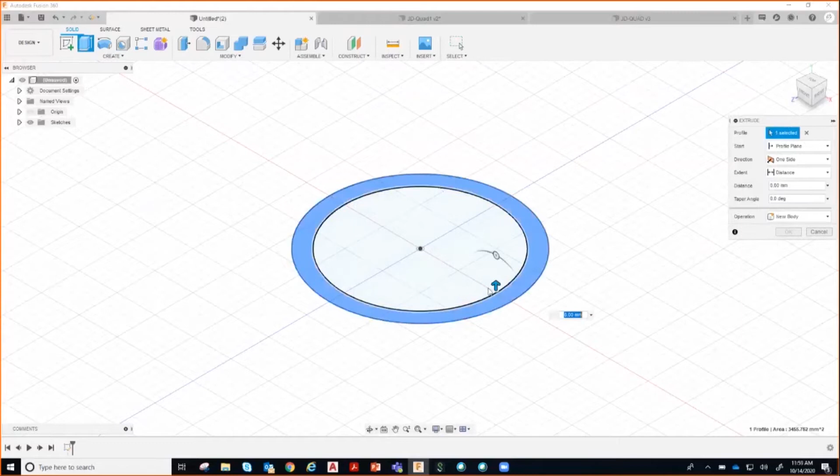So I'm trying to create a circle with diameter 120, and one more circle to give the thickness here. So this one will be 100. Finishing this sketch, I'm going to extrude this particular profile. This height I gave as 100. This is the center of my quadcopter where I'm going to place my battery, controllers, everything inside this.

And the next thing for the quadcopter, we need to have a place where we are going to fix the motor and the blade. So I'm going to create one more sketch here. Let me start sketch, I'm going to create it on the top plane. I will create a circle here, this one supposed to be 60 diameter, and the thickness supposed to be 10. I'm going to create one more circle here, so this is 50.

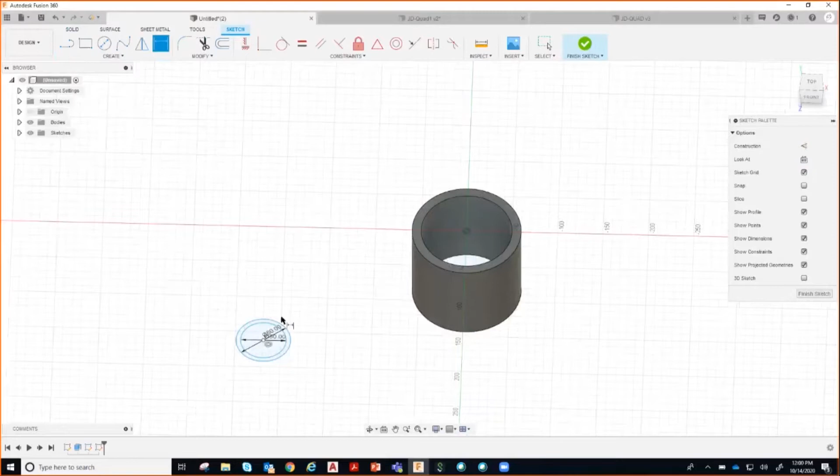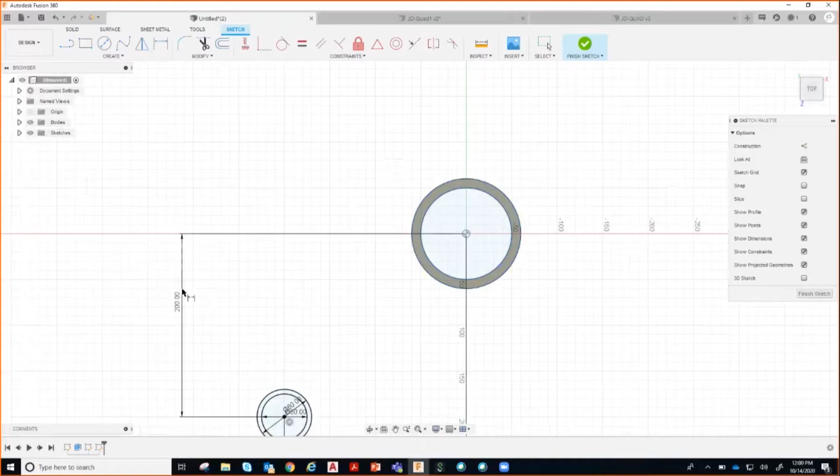Now the dimension for this. I'm going to create dimension from this center to this center, axis center here. This is supposed to be 200, and the same vertical dimension also I'm going to take as 200. Now, finishing this sketch, I'm going to extrude this again, extrude this particular profile towards bottom, in the minus direction. So I give this as minus 50, 50.

So obviously, for the quadcopter, we need to have 4 components where I can fix the motor and blades. So I just have to pattern this particular model here, circular pattern. This whole thing I'm going to create as a pattern, and the axis will be the center, and the number of quantity, so I change it to 4.

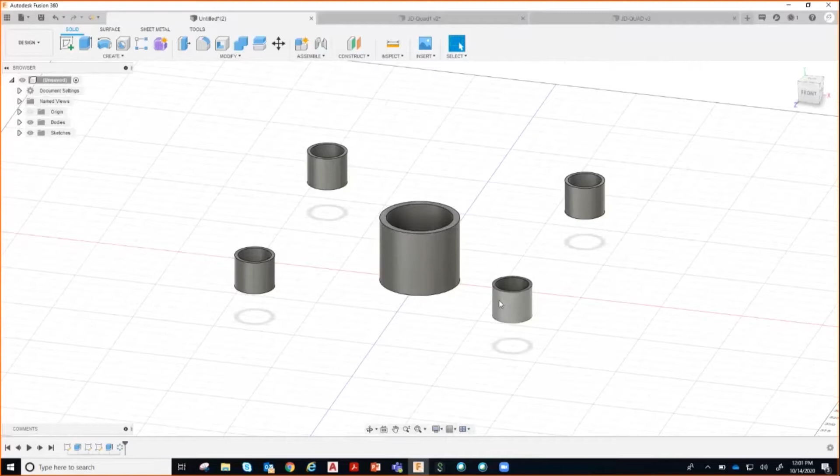This is the basic design, basic idea of what I have. So I need this big space to place my battery and all the controls, everything, PCB. And next, these are the 4 places I need to fix the motor and blade. This much knowledge I have at this point, this is the basic thing. Next, I don't have any idea how I'm going to connect all this, what should be the best shape so that I can reduce the weight. I can have a minimum weight on this so that the drone can fly properly. First thing, second thing the manufacturing criteria, and the third thing, load - how much load it is supposed to carry.

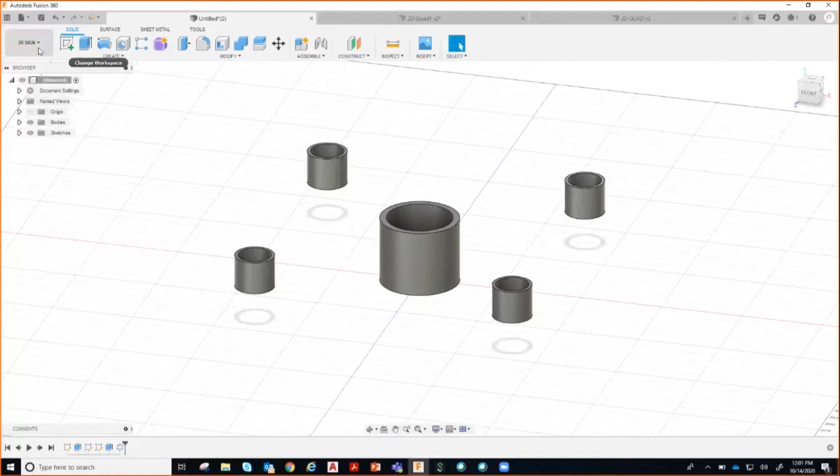To consider all these things, what I'm going to do now is start with the generative design. Once I click on the module, here you can see the generative design. After selecting this generative design, you can notice the complete user interface will change here, and you can notice the toolbar.

So once after completing this, there are a couple of things you have to notice. First, if you go to guide, the software will help you understand step by step how you're supposed to use this generative design module. It has been explained in a very simple way.

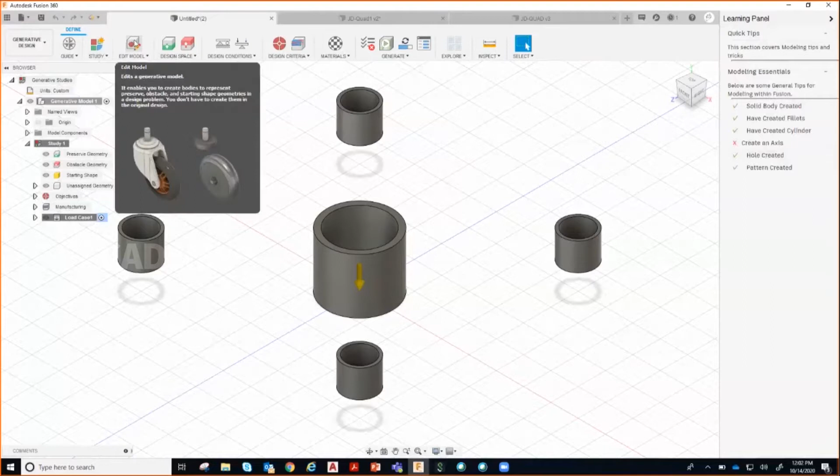So first thing is study. You can have multiple studies on one single file. If you want to edit the model, we have to consider preserved geometry, obstacle geometry, and loads. I'm going to start with these locations, as I mentioned I'm supposed to use for my drone. That means this 3D model is my preserved geometry.

I must have this 3D component in my drone design. So this is the preserved geometry. I have made all these components as preserved geometry, which I'm going to include as part of my drone. This is must and should, so those components I have included here.

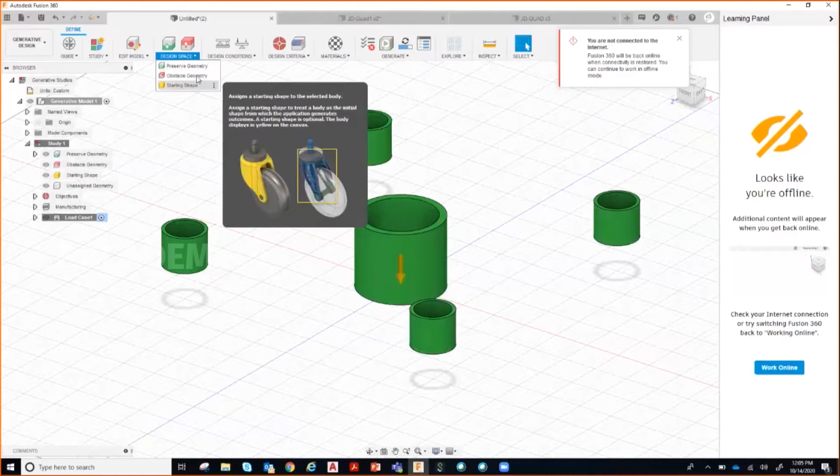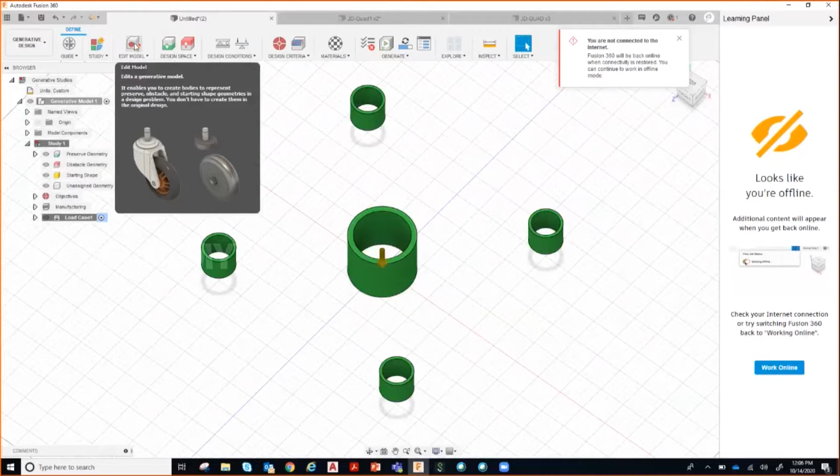The next part, I have an option to assign the obstacle geometry. The obstacle geometry is something where we do not want any 3D solid fill. I need sufficient space for all the other 3D models I have created, which is already preserved geometry. So I will select edit model, which is only applicable to this generative design. Whatever I create here is not visible on my Fusion 360 design screen.

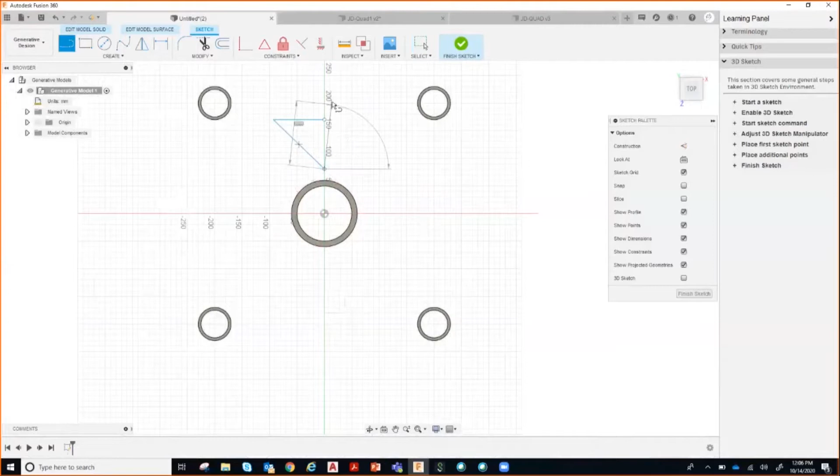Selecting edit model, I'm going to create a simple 3D space, creating a sketch on top of this plane. I will create a triangle here. This is the space I don't want the software to consider filling; I want this to remain free space. I'm selecting all this and mirroring it. Then finish sketch, and I'm going to extrude this particular portion.

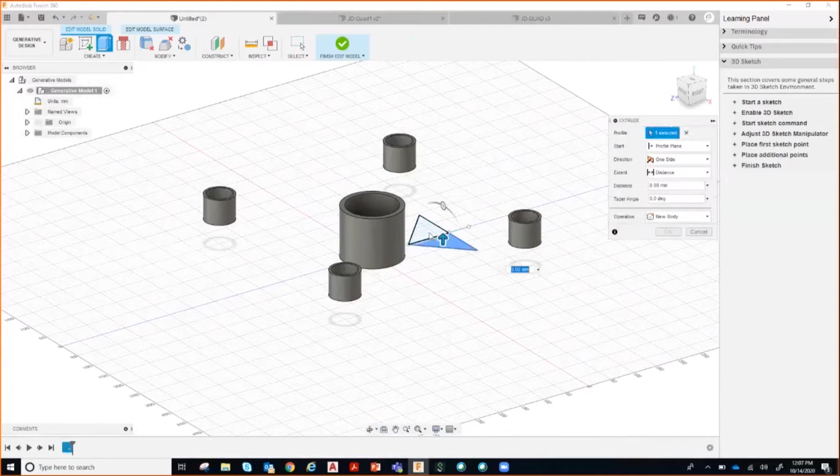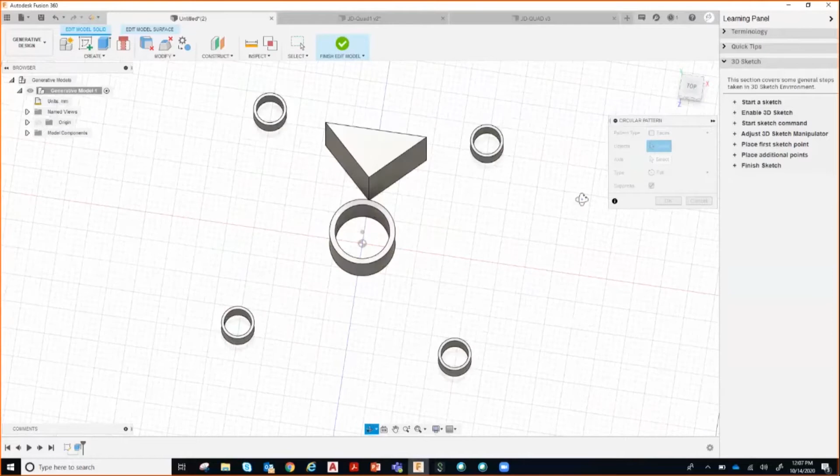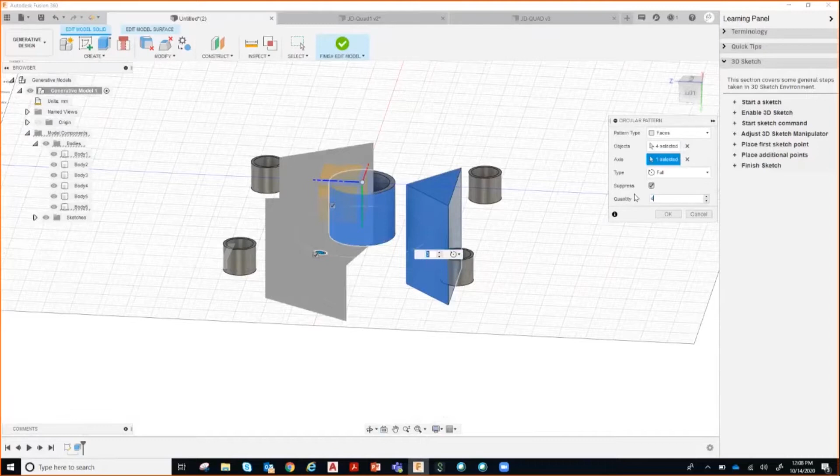And I will try to create a circular pattern of this. For axis, I'm going to select this center, then quantity 4. Sorry, it's not selected properly. Circular pattern - I'm selecting this component. Axis, this is the axis, then quantity I will select 4. Something wrong, okay let me just edit the sketch so I can create the pattern there instead.

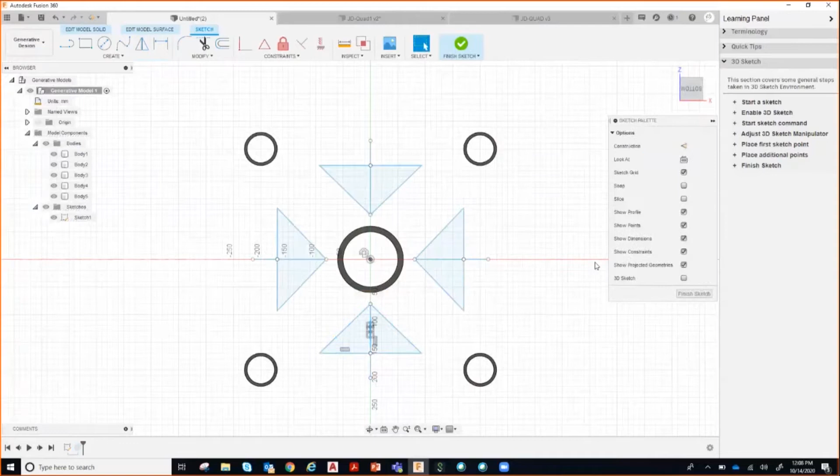In the model you can notice there are 3 additional pyramids here, which are not visible in my design - this is only part of the generative model. I will convert these into obstacle geometry, meaning something is going to come here, so the software should not consider this volume to fill with generative design. That has turned red now. So these are the preserved and these are the obstacle geometry.

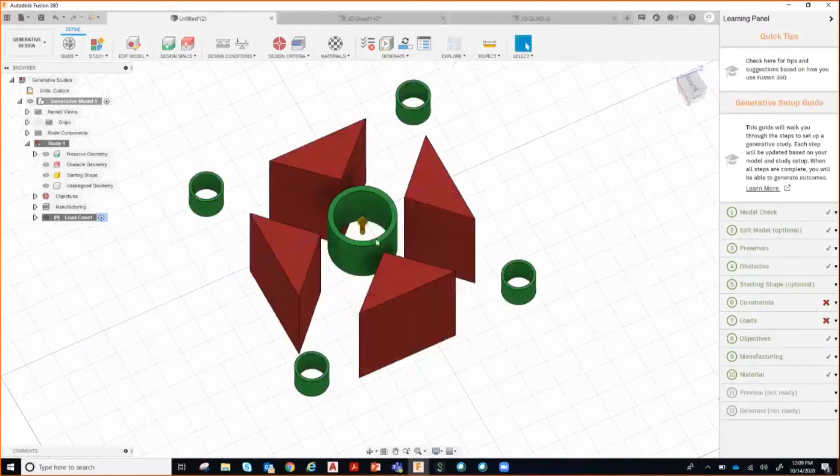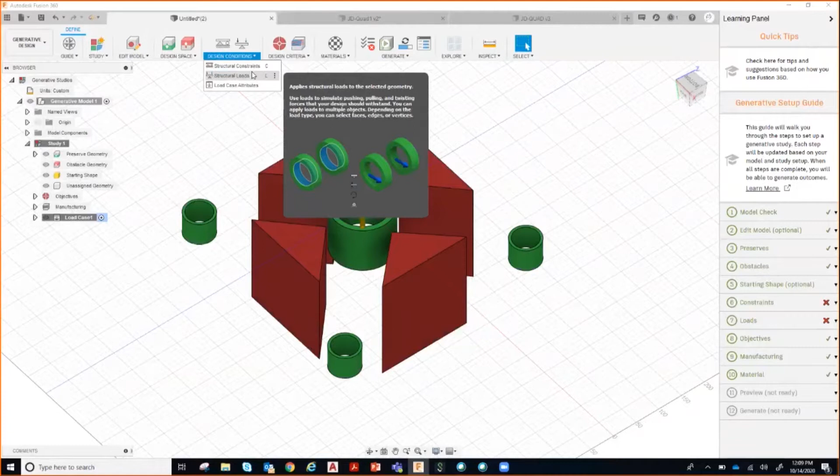Very simple. Then after that, the next important thing is load and constraints. By the time of designing the shape and filling the material, the software will consider the load - the stress on top of this, which will be handled by the drone. That will be considered at the time of creating the shape.

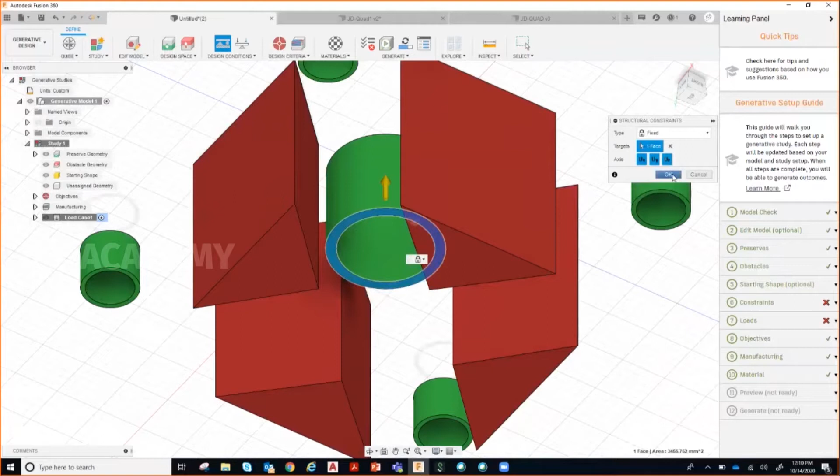So now, selecting structural constraint, I will select this drone base as constraint - this is the fixed geometry structural constraint. You can see the icon also visible here, fixed constraints. And then for the load going towards the top, I'm selecting structural load and I'm going to select the top face of all these.

What exactly you want to achieve - the first one is objective. The objective of this particular drone, why I'm using generative design, is to minimize mass. Normally for a drone we prefer a lightweight design so it doesn't require a heavy battery or heavy motors. I want to reduce the overall weight, but it should still be capable of carrying the load I've given, 100 Newton. So minimize mass, and the safety factor as per standard is showing 2, which I want to continue with. So I will select OK.

And the next very important part is manufacturing - how we are going to manufacture this.

The more manufacturing methods you select, the more shapes or suggestions the software will give. If you minimize the number of manufacturing methods, you get fewer shapes to consider. Here, unrestricted additive manufacturing is already ticked, so I'll consider this to manufacture using my 3D printer.

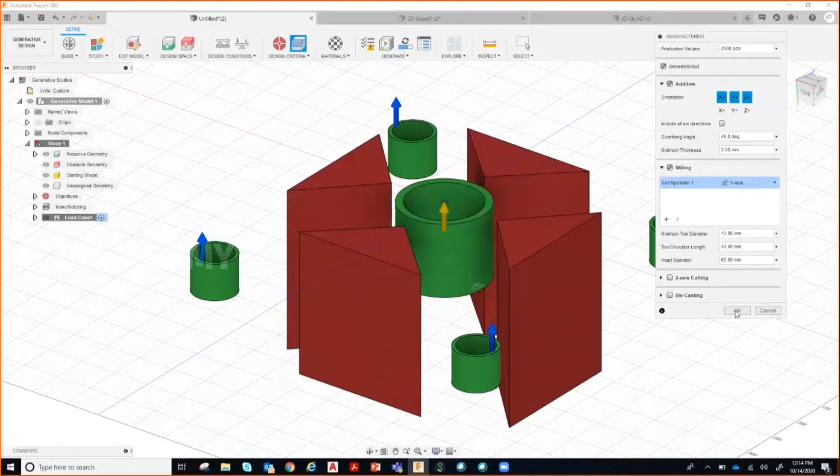Once I select OK, the next part is material. This is more important again - which materials do you want to consider for the manufacturing of this particular quadcopter? Once you click on material, the software will load the material library here, showing the inbuilt different material compositions which are available.

Metal and plastic are both available in the library - you can search the Fusion 360 library, and if you know the material composition, you can add or create your own material library. For example, from metal, I would like to consider aluminum AlSi10Mg, and I'm going to drag and drop that material for the method consideration here.

Inside the method, you can use additive or milling - which one you want to consider this material for. I don't want to filter that, because nowadays you can even use a 3D printer for metal manufacturing. So I'm not going to limit the manufacturing method - I'm considering all methods and including a couple of different materials for consideration.

So here I'm going to select this aluminum which I have already loaded, using the Fusion 360 normal material library where I can look for metal - aluminum grade, I'm going to select 1100. Then I want to consider ABS plastic as well.

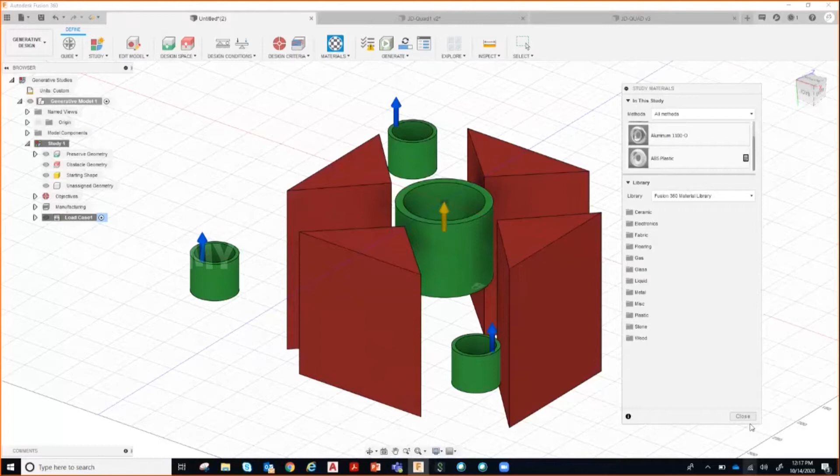Right now, in this case, I have selected 3 different materials: aluminum AlSi10Mg, aluminum grade 1100, and ABS plastic. So most of the things I have already given input for, and the next very important thing here is pre-check.

By clicking on pre-check, you can see the software is giving some warnings. These warnings relate to material cost or manufacturing cost, but because here in India we have not uploaded that particular information to the software, it won't be able to give that information. So here you can see: the study's geometry may be too large to be 3D printed, and it may affect the ability to estimate the manufacturing cost.

If the warning is showing in this kind of icon, you can ignore it. If it's showing a red dot button, that means it's a warning where you have to repair your model before you execute. In this case, I can ignore these warnings and just close this.

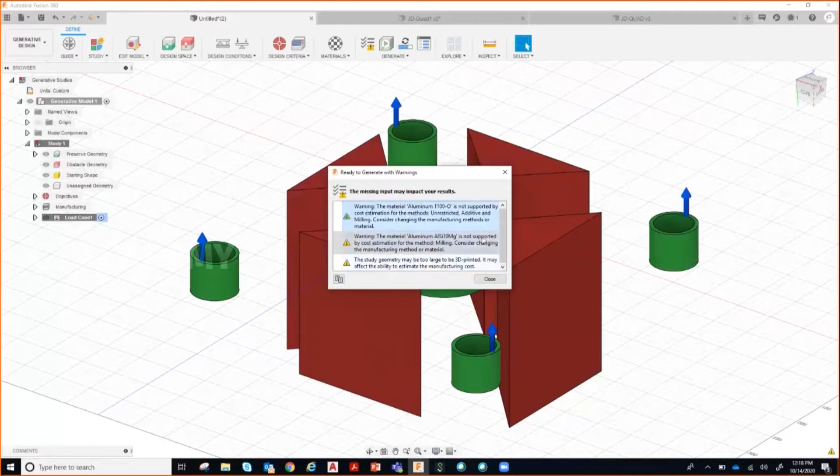The next step here, you can see previewer. This previewer will help you understand how this is going to be executed, what shape the software is going to generate. By selecting this previewer, the software will start creating it - a kind of water wave visibility will show about the material and the shape. So the software is generating that previewer.

It will take a couple of seconds before you execute your 3D model.

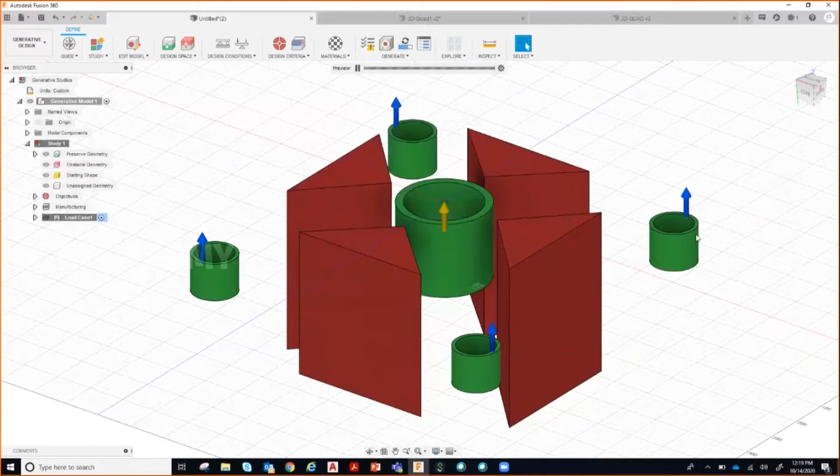I just want to repeat the whole process here, starting from importing the 3D model, once I start my generative design. So the basic 3D model, whatever I have created, is available here.

The existing component which I want to secure, I'm selecting that as a preserved geometry. I have selected all these 5 cylinders, and I have created this triangle using the edit model function, so that I can create that into an obstacle geometry where I don't want the software to fill any material inside this volume.

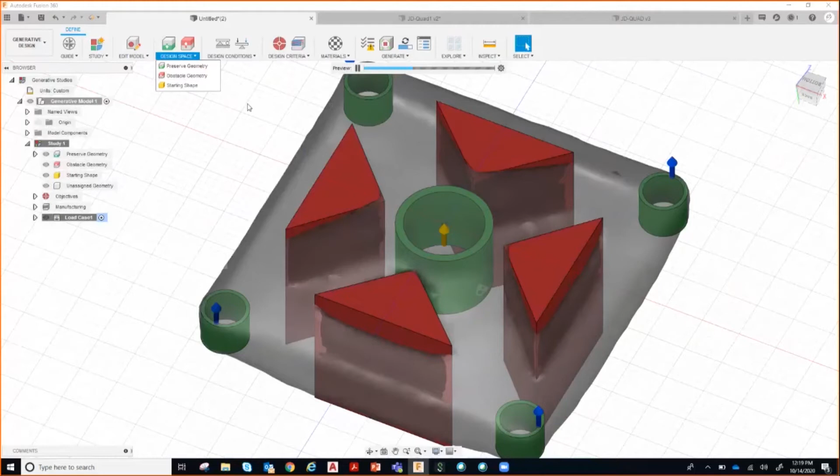Then I have given the constraint. I have fixed the constraint at this bottom, and load towards top, that I have given 100 Newton here using the structural load.

Then the objective of this particular design: I want to achieve a lightweight drone which can carry the load which I have given, 100 Newton. The objective is to minimize the overall weight.

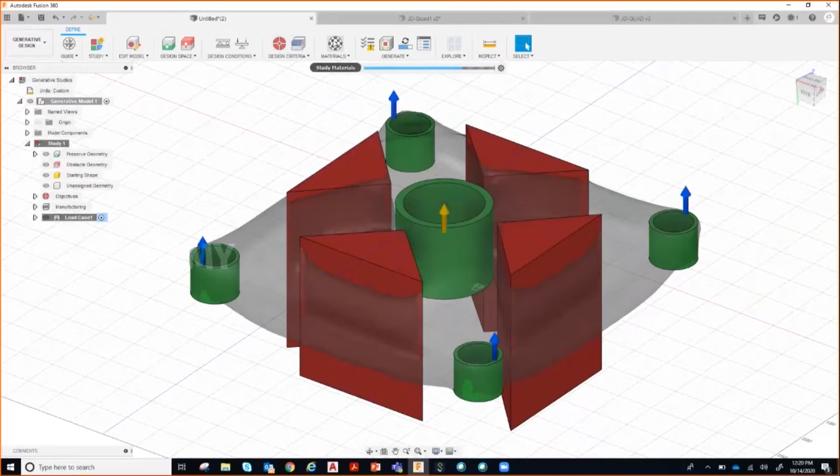Manufacturing method, I have given 2 different types of manufacturing method, additive manufacturing and subtractive manufacturing, where in the subtractive manufacturing I have given 5-axis milling, so the software can consider even complex shapes to design. In the material, I have added 3 different materials, 2 aluminum class, and 1 ABS plastic.

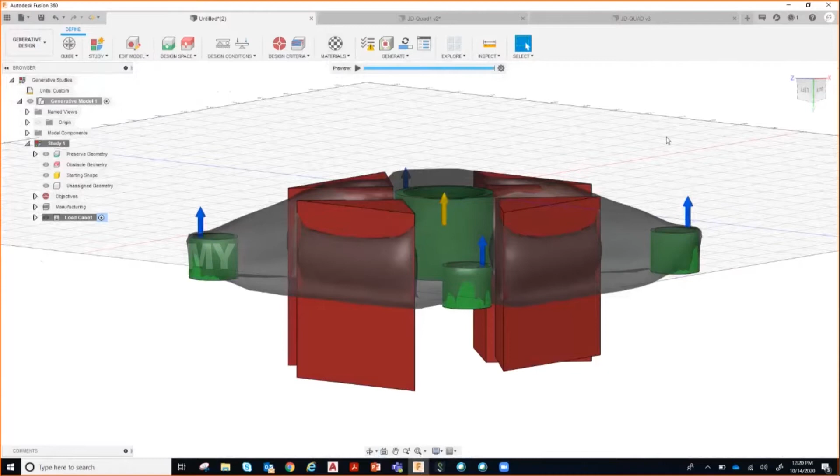After that, here you can see the software is creating the shape. You can notice there is no volume inside this particular triangle because this is the obstacle geometry. And the software is adding all these cylinders to be part of this particular quadcopter. So this is a basic preview, how it might look.

But this is not the shape actually, this is just where exactly the software is filling the material. The overall boundary, the software is giving an idea. Once after that, you can stop the previewer.

And then here you can see generate. By clicking on this generate, the software will show the particular study 1. So that is the generative design model.

And this process is not on your local computer. Let me highlight, this process doesn't happen on your local computer, because this overall process, considering the load, manufacturing method, everything, the software is supposed to generate the shape. This process happens on cloud.

In my case, I have unlimited cloud credits, so it is not highlighting the cloud requirement, so it is just blank. But maybe in your case, if you are using a 1-month trial version or something, it will give some limited cloud credits, so that will be highlighted here, how much cloud credit it will take.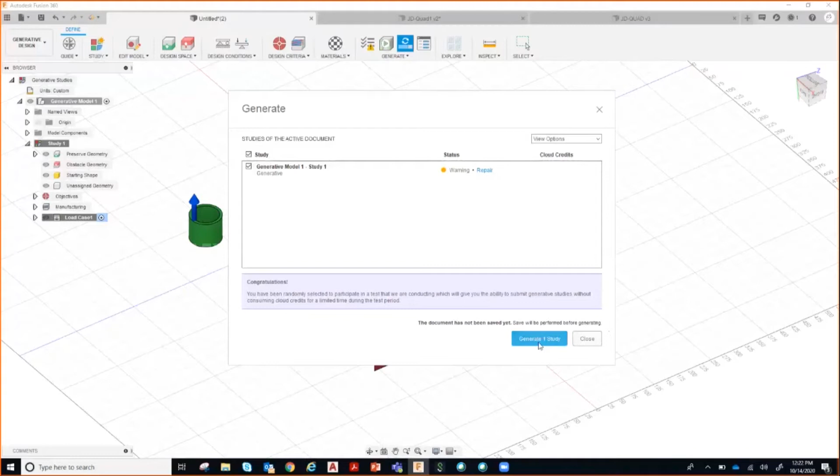Once after all this, I can just click on this generate one study. Once after clicking this, it is asking me to save the file first. I am saving this as drone test. Save the file.

Now you can notice the software started working on this generative design, creating the solid 3D model, and you can notice the job status is on cloud. The status, it is not yet started. It will take a couple of minutes to execute the 3D model.

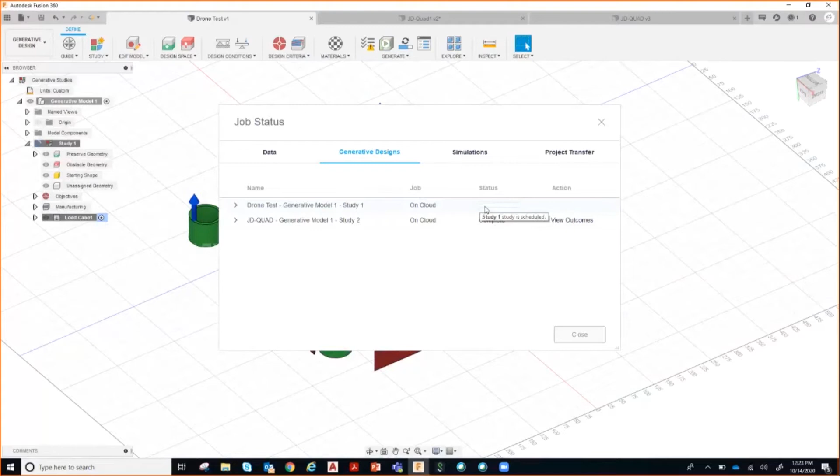And of course you can just imagine, I'm creating something, I'm generating something, considering so many criteria, whether it is manufacturing method, whether it is additive method, whatever exactly I want to achieve, so that I am supposed to reduce the overall weight, and I have to maintain the stress, strain, considering the load, what I have given, 100 Newton, and I have to maintain the safety factor of 2 as per the standard.

Considering all this together, the software is generating the model. You can imagine the time and the process which takes place in the backend. So all this process is going to happen in the backend.

So I can just close this window, and here you can see the software start updating based on the backend process. So once it completes any model, automatically all those models will be visible on your screen. Rather than model, I can say these are all the suggestions.

Now, this will take about 20-25 minutes. I don't want to waste that time, so I have already created the same thing, and here you can see how this previewer looks. The same screen here, so right now in this particular exercise, it is still started. But once after it completes, it takes about half an hour, 25 minutes or something, then after that the software will give you all these inputs.

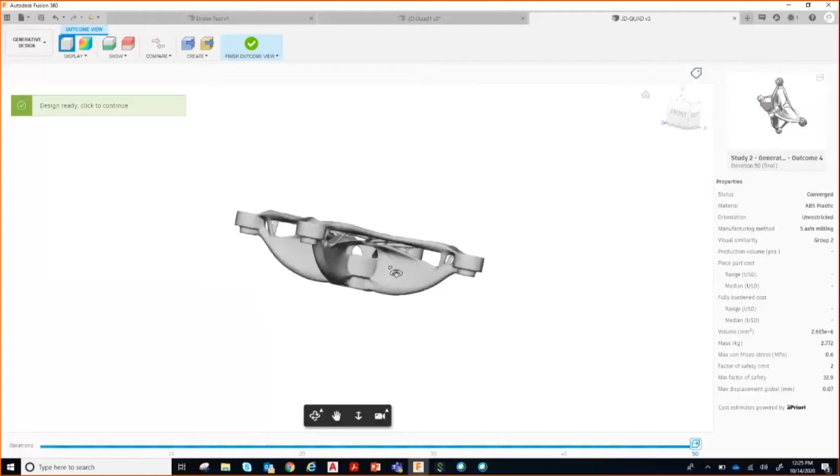The component which you have already given as the preserved geometry is still there, no change here. But the software added material in all the remaining area. And for that particular model, the overall information you can find here: status, converged, material ABS plastic, orientation.

Sorry, Badri, I would like to add here. This is really interesting, which is going on. So all of you have seen the process here. It's completely the system goals that what we have given. We have given the constraints, and there is an inbuilt algorithm which synthesizes the solution.

What you can see is several alternative drone bodies that the generative design is creating for the given goal of solving against the force, the lift of all 4 propellers that you've seen, and also the gravity load of the battery.

And it looks like you're seeing the process of erosion. What is meant by erosion is how the process happens: on the first iteration, the algorithm does not know where to start, so it inserts a block of material between, let's say, the propeller mounts and the battery housing. Then it removes all the material which is not needed to accommodate the loads, and stress analysis is run at every iteration to check the progress, and it keeps iterating to satisfy the load conditions, and then it starts again with a different material.

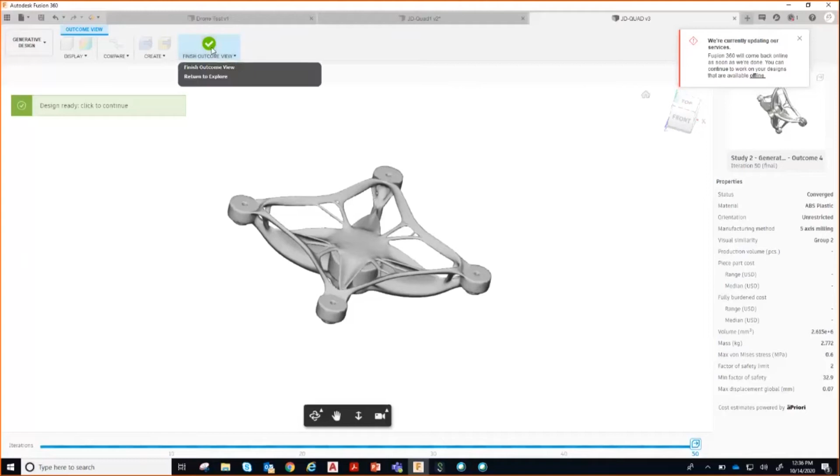So this is one consideration. Once I finish, I can select another one. So if I want to consider multiple, I can select multiple models together, then explore those models together.

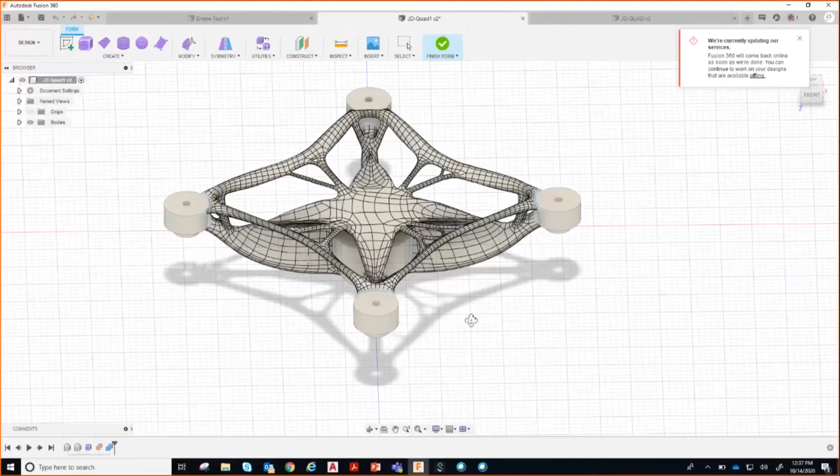So where I can easily compare the models, and at the same time I have options available. I can finish exploring and go back to an individual selected model, for example this one, which I really want to extract to my 3D model. I can extract that particular shape to my design space, the same thing I've exported to my design space from this suggestion given by the software.

One second, just an internet connection issue. It's showing my job status is offline. I'm trying to go online so that I can explore more. Sorry for the inconvenience, there are some technical glitches here. Just give me a second.

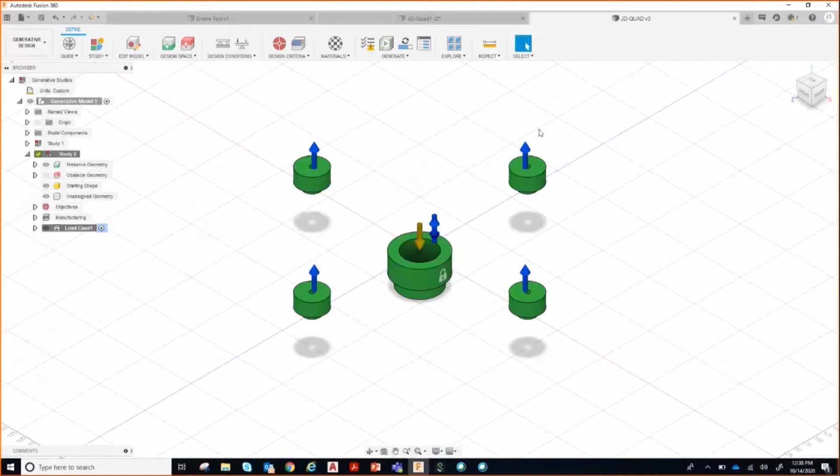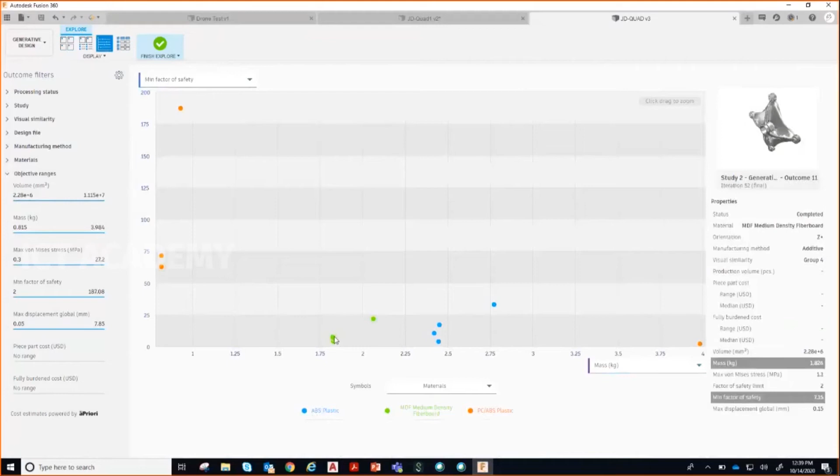That starts from 1.75 plus some kilo, and the safety factor. Clicking on this, for example, the safety factor is minimal here, so I want to go close to this, with more safety factor. I can select this particular one, which is 2 kilo, and this material is medium density fiberboard. Once I select that, the software will show the preview of that particular shape.

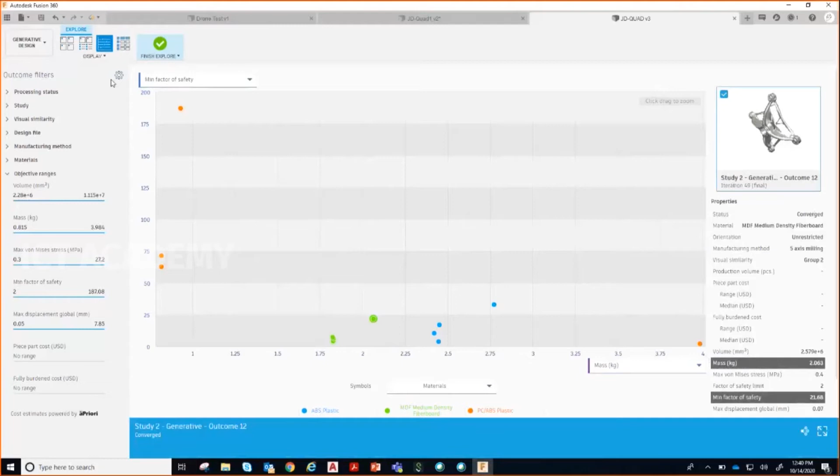So this is outcome 12. Inside this different outcome, I can select that particular outcome 12, and export that same thing to my 3D model.

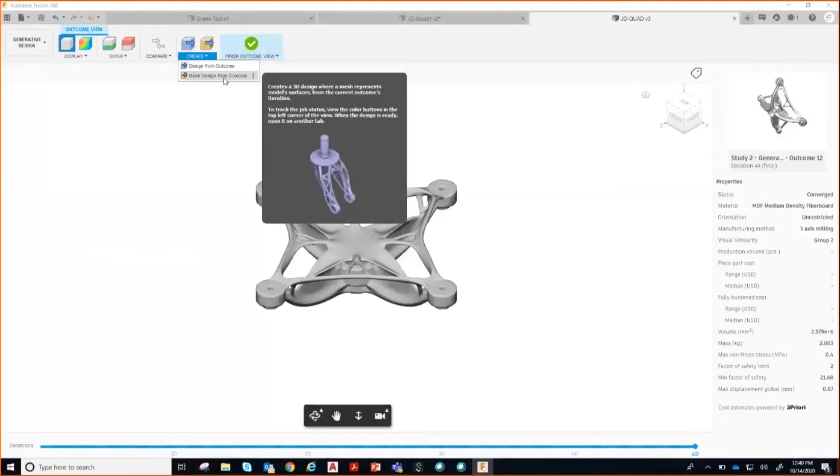Here you can see the option available, create, design from outcome, mesh design from outcome. If you're looking for the normal CAD ready output, you can select design from outcome. Once you select it, the software will show again the cloud credit required to export this particular shape.

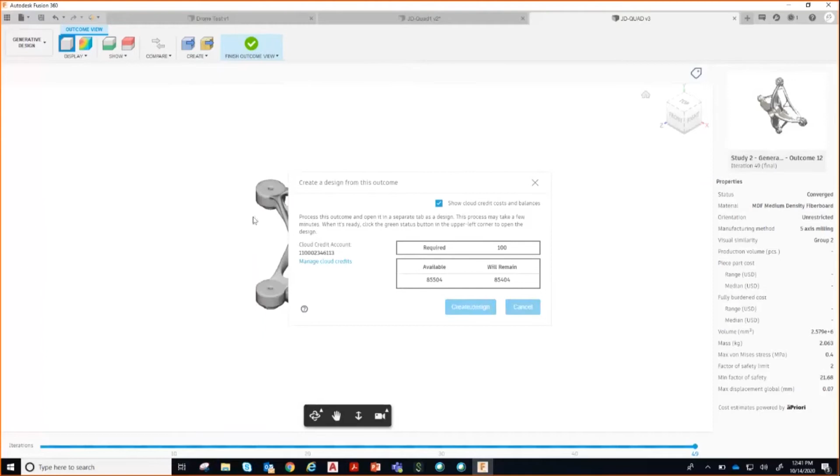So by selecting that cloud credit, you can select create design. Once you select create design, the same shape you have created will be exported as a separate file into Fusion 360. And this is exactly how it looks, this is your actual 3D model.

This 3D model is exactly the same as whatever you create using extrude, revolve, all the functionality, it is the same. If you want to further edit this, all the shapes created by generative design are free forms, but you can see this is CAD ready 3D solid.

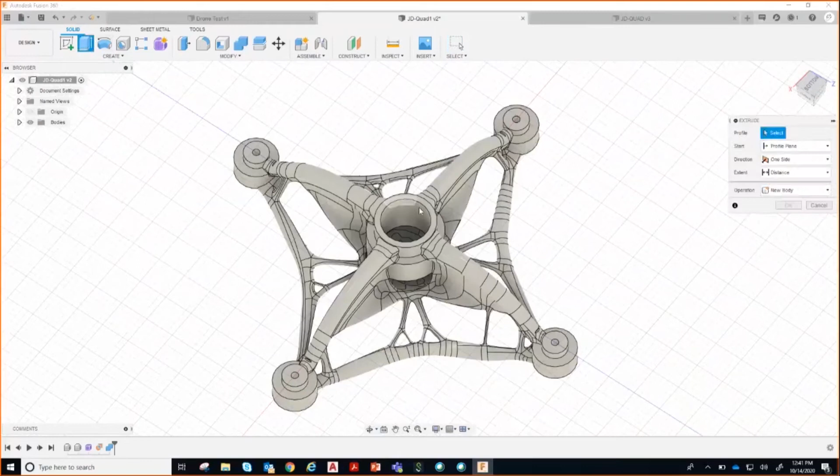For example, here I want to have this complete space opened up. So I can go to the extrude command and select that particular profile to extrude. Now, for example, I'm going to create a circle exactly at the center.

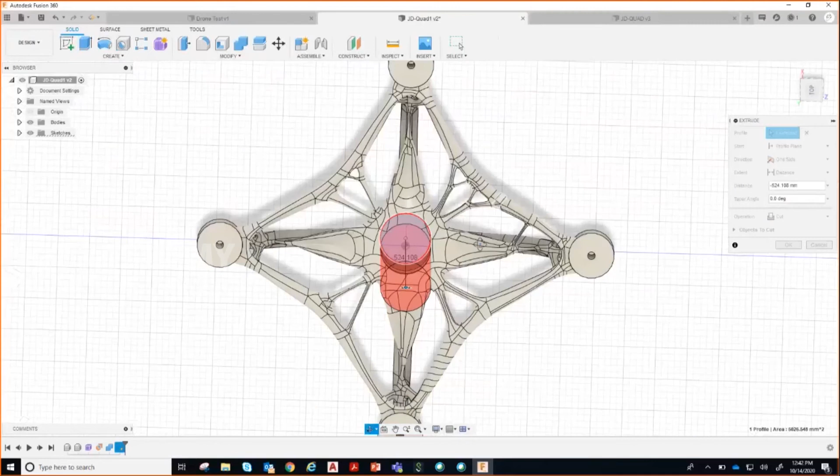Then I can use the extrude function, selecting this profile, I can cut the material. Can you see? Even though it is generated by the generative design module, it is still a normal 3D solid which you can edit further.

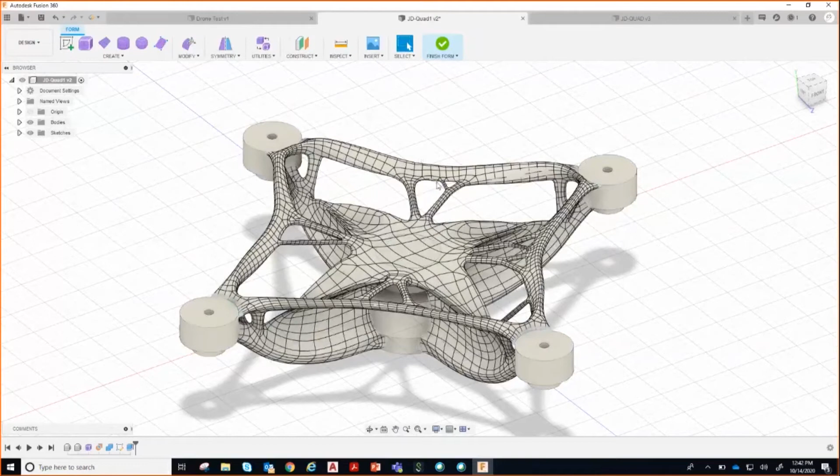Even the freeform shapes you can see are also editable by going to freeform. If you want to change the shape, want to fine tune it, you can fine tune it further to bring out the final output.

So to recap, we started with a simple cylinder in this particular model. We started from here, added input at the generative design, gave the preserved geometry, obstacle geometry, then added the load. After execution, the software gives multiple outputs, depending on the material and manufacturing method, and the same thing you can extract to a CAD ready model or solid model, and that would look something like this.

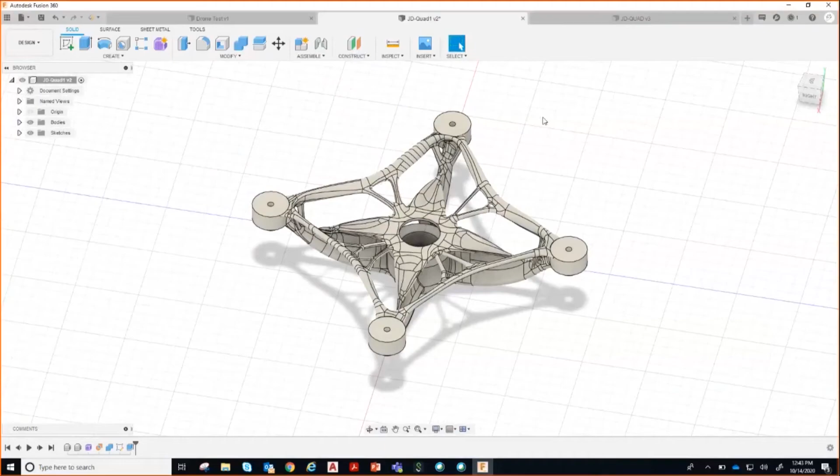As you know, Badari has given the options regarding different types of manufacturing options for this drone frame. But as we are supporting most of the manufacturing methods like additive, the interesting one and key requirement is also about die casting, 3 and 5 axis milling, 2.5 axis, and also 2 axis cutting. Now 2 axis cutting is fantastic because most Indian workshops have this facility, and based on your shop floor requirement, you can put those manufacturing constraints into your generative design study.

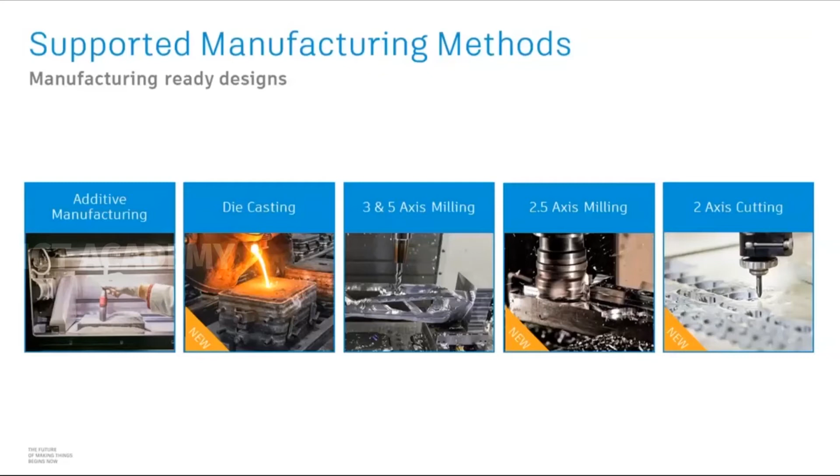Let me go to the next slide. Here is another project where we also talk about generative design, with the example of an engine bracket. I'm not sure whether you can see my screen, but yeah, here we have synthesized a new bracket to meet the performance criteria, and the one on the left actually also has some weight optimizing criteria.

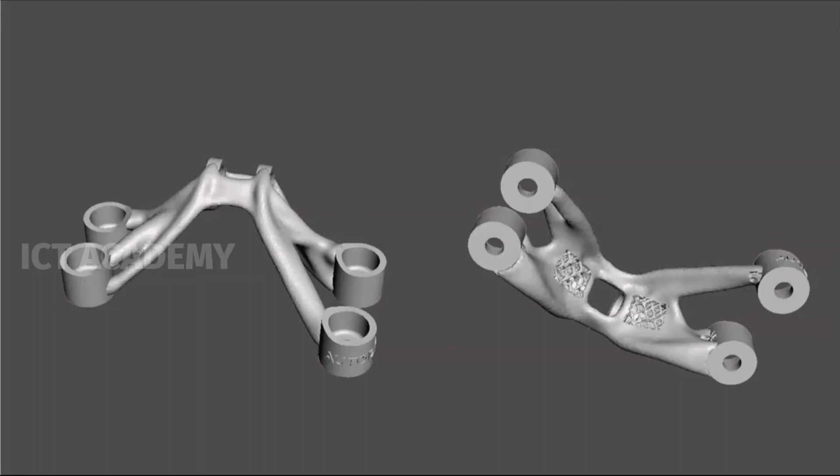But on the right there is a similar part which was generated by generative design, but it's lighter than the previous one. We used lattice structure optimization in the whole process. It also mimics bone structure by adding material only when it is needed, and we can also remove material when it is not required.

This is based on the stress concentration area. If we have a higher stress concentration area, you'll get a more dense lattice structure. And this is a new class of algorithm, it's so intelligent that it will make the complete bone structure.

Okay, but since it's computer-based, it's really fantastic to be able to create these kinds of hip bones as well. So this is one of the examples of doing further optimization for this.

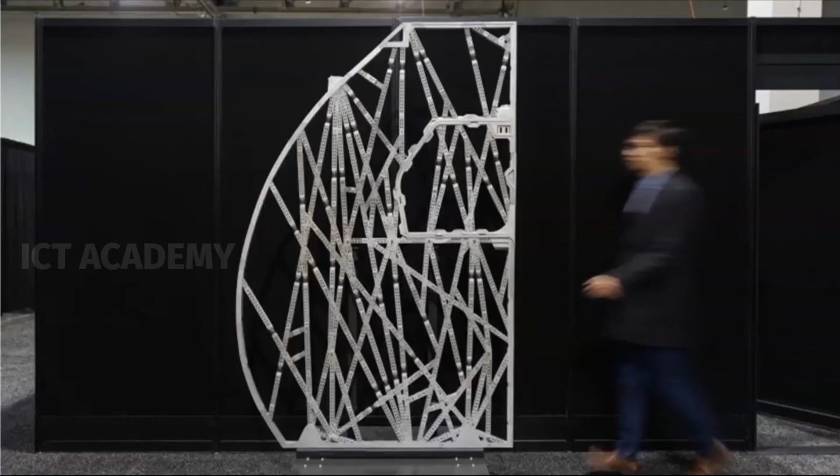One of the exercises is about beam structures in generative design, and the algorithm used to resolve the loads and find a completely global shape. And another algorithm is used to optimize the individual beam in the partition.

All of you have seen FEA. In FEA we have the element stiffness matrix and the global stiffness matrix. Based on that, we apply the element stiffness matrix and then consider the global stiffness matrix in order to find out all the nodal values. So similarly, I think the objective is the same in these multi-objective studies, which are really ambitious projects.

In this particular project, we got around 30% weight reduction, and for the aerospace industry, that is a super performance, I would say.

Now, these kinds of beam structures, apart from the weight reduction you've seen in the regular algorithms, sometimes you also give a goal for strength. For these partitions, you can set up a goal of, say, 200 millimeters, or some deflection level under, for example, a 16G crash test.

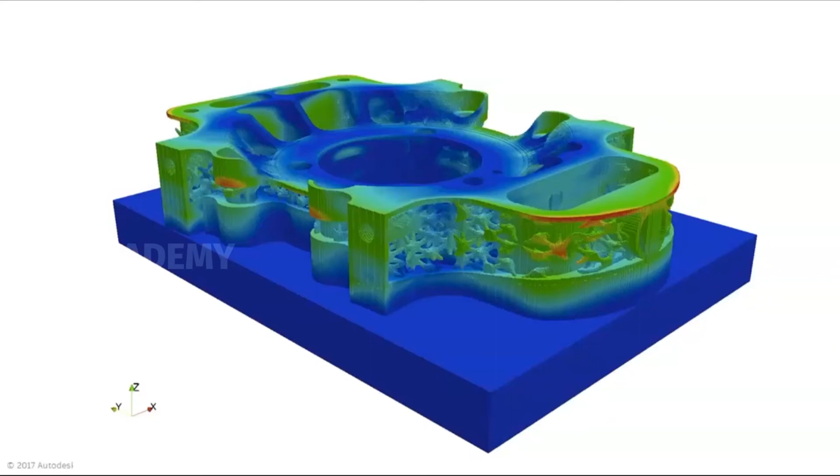Now, for the milling process, Autodesk has developed many algorithms that add geometry constraints for milling into the live milling process. This also adds a lot of value in product design, and you can explore limitless options when you think about materials and then about manufacturing processes like milling.

And these constraints will really add value in terms of exploring which are the right options for you to move forward with.

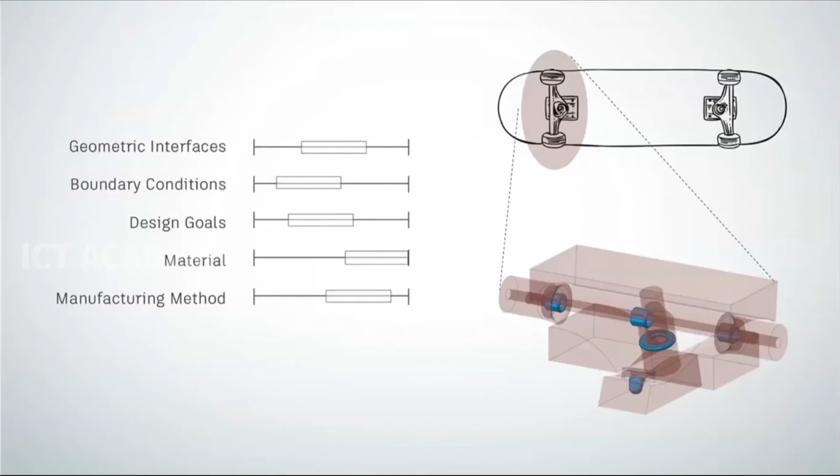Sometimes, as Badari represented in the process, we've seen the boundary conditions, set up some design goals, assigned the materials, and applied different types of manufacturing methods. The generative design tools actually help us see different types of manufacturing-ready options.

That's something practical, and we should look at that aspect as well. Now, as we explore generative design and look at the rest of the manufacturing spectrum—like composites, casting design, or injection molding—we have a comparison, and it really helps us take a design decision on which design to move forward with.

Sometimes the design could be completely out of the box, because our designers cannot imagine such kind of forms. But as we have seen the functionality and the flow of giving design goals and constraints within the Fusion environment, it really helps us explore further designs as well.

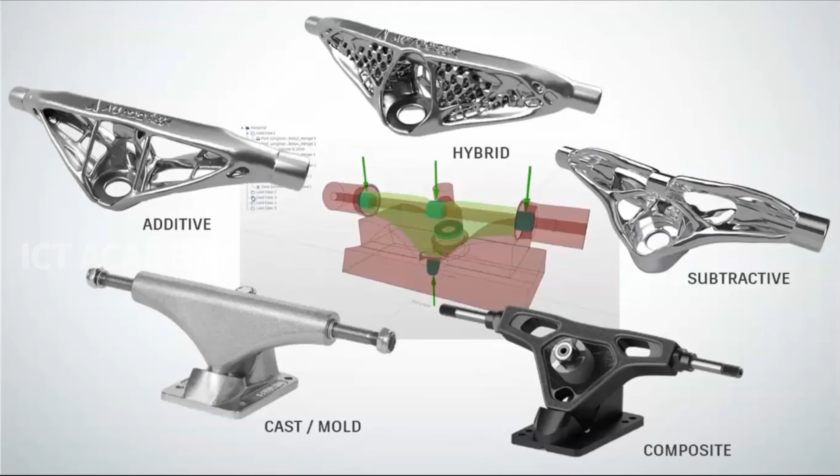Another part is the cost estimation, because once we start exploring the cost per unit versus the performance, you have different dots, and ultimately we want the product person or company exploring this to see the full design workspace, with predictability from part design to production, including prices. That's really awesome when we think about this trade-off of cost per unit versus performance.

It also gives fantastic ideas about which manufacturing method to go ahead with, because that prediction allows us to take decisions about a specific product or specific outcome of this technology.

This leads to discussions like how we are going to specify products going forward, talking about product sense and design themselves. I think the answer lies in understanding generative design techniques to augment this, and this technology will also have the ability to solve different types of design problems.

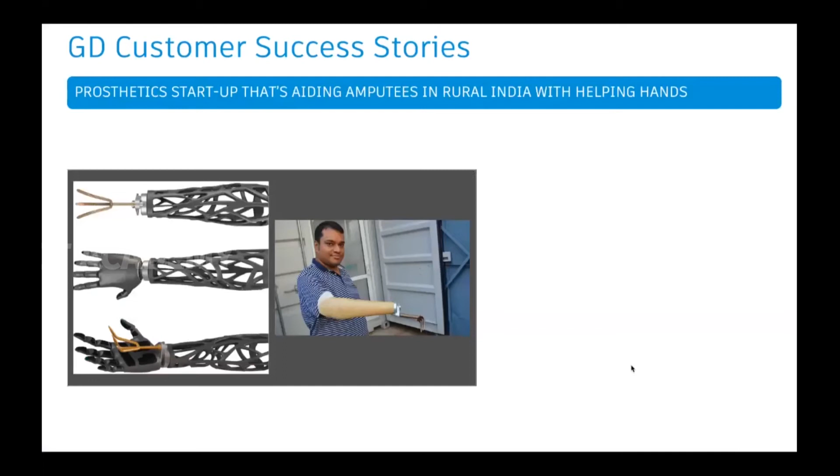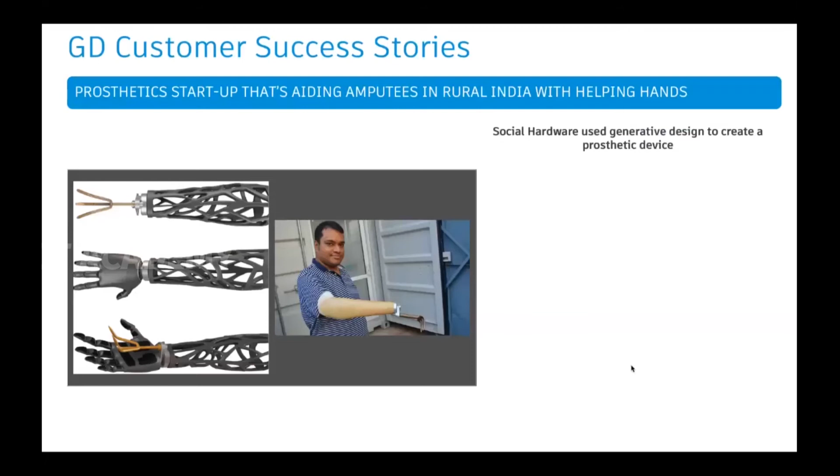Here's a company, Social Hardware, an Indian-based prosthetic startup whose dream is to aid amputees in rural India. If you look at the disability report in India, 2.21% of the total country's population lives with a disability, and 20% of that population has a disability related to movement.

Mr. Kumar and Mr. Norris, co-founder of Social Hardware, saw an opportunity and a need for a new approach to prosthetic design, to design an upper limb, which is what you see on the left side.

Currently we have two kinds of prosthetic limbs in the market: externally powered versus body powered prosthetic limbs. There are certain challenges here—the externally powered limb has issues with the battery, while the body powered limb has issues with its weight. Social Hardware's team wanted to achieve a balance between these two, so what they did was adopt generative design in their case studies.

And that's where they were able to come up with a design that can suit both needs, giving an aesthetic look as well as producing a lighter weight product. In Mr. Kumar's own words, with the use of generative design, they were able to reduce the weight from 300 grams to 96 grams, which is a drastic change in terms of weight, while absolutely maintaining the durability and stability of the product.

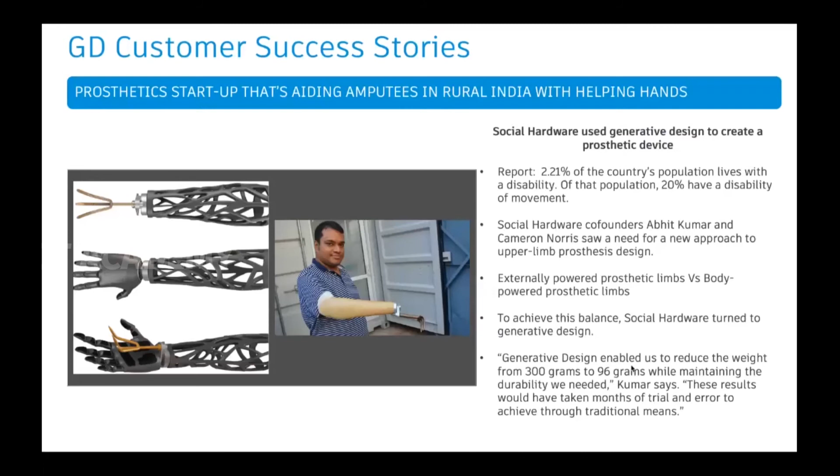Let's move to the automotive industry. Here's another example from Lightning Motors. Richard Hatfield, the CEO of this small motorbike company, had a dream to build an electric bike more promising than a gas-powered bike. So the designers at Lightning Motors adopted generative design and additive manufacturing in their workflow to design a lighter and faster motorcycle.

One of the biggest challenges in the automotive industry or motorbikes is reducing weight. But as designers, you also have to maintain stability and comfortability of the ride without compromising. So the designers' objective was not only reducing weight, but also giving a comfortable and stable ride to the riders. That was their overall objective in adopting generative design.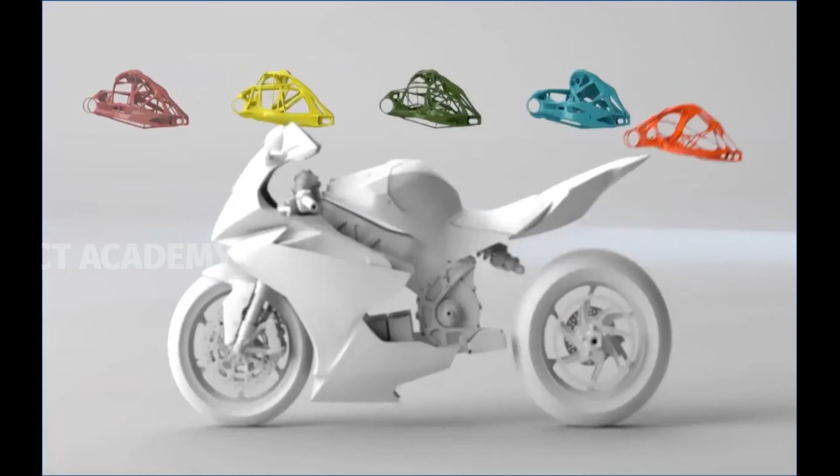Let me maximize the screen so you can see exactly how the preserved geometries are created and how the obstacle geometries are applied. Identifying the preserved geometry, identifying the obstacle geometry, and considering different scenarios to build the product, and how each one fits in with different variations. You can see the change in color, the complete rotation, and fitting it to the bike, which gives an aesthetic look while meeting all the criteria and maintaining the design output with the conditions applied.

So it's not just this - they also thought about how they used Fusion effectively to understand how the total product development innovative platform can be used in designing the swing arm. Let me switch back to my presentation. That was another example.

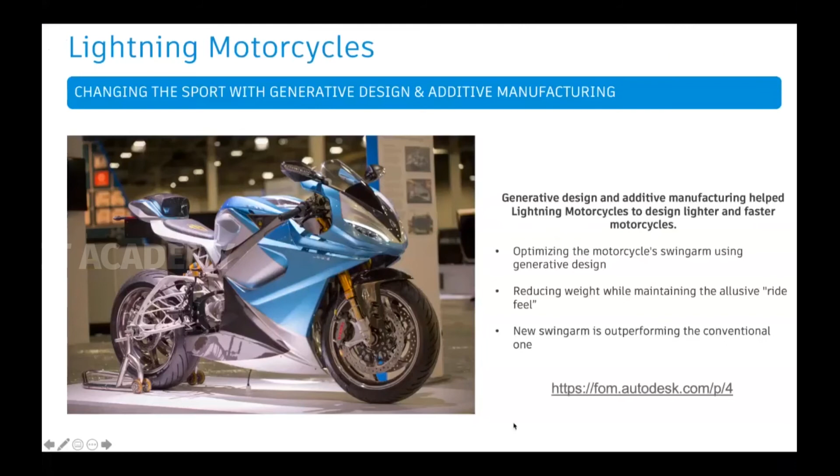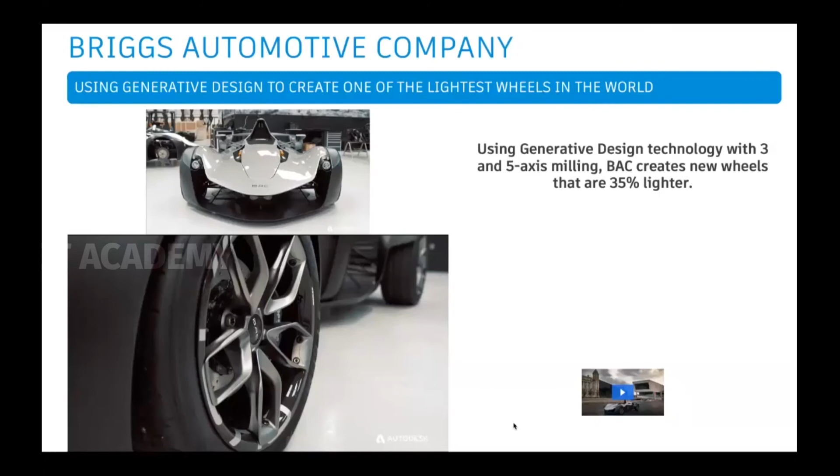Here's an interesting example from the automotive industry where car manufacturers have adopted generative design in their workflow. Briggs Automotive Company not only used generative design in their technology, but also incorporated traditional manufacturing methods like 3-axis and 5-axis milling to develop a component that's 35% lighter than previous ones. Using generative design, BAC was able to create one of the lightest wheels in the world.

The designers who adopted generative design at BAC were able to explore more design options based on the performance constraints applied in their workflow. With generative design and traditional manufacturing methods, they were able to drastically reduce the cost to develop this wheel. To their surprise, the wheel produced by BAC was only 2.2 kilograms, which was very impressive - 35% lighter than the previous version.

Let's hear directly from them through this short video about how exactly generative design and Autodesk helped them come up with a wheel that is lighter than others in the market.

My name is Neill Briggs. I'm co-founder and director of product development here at BAC.

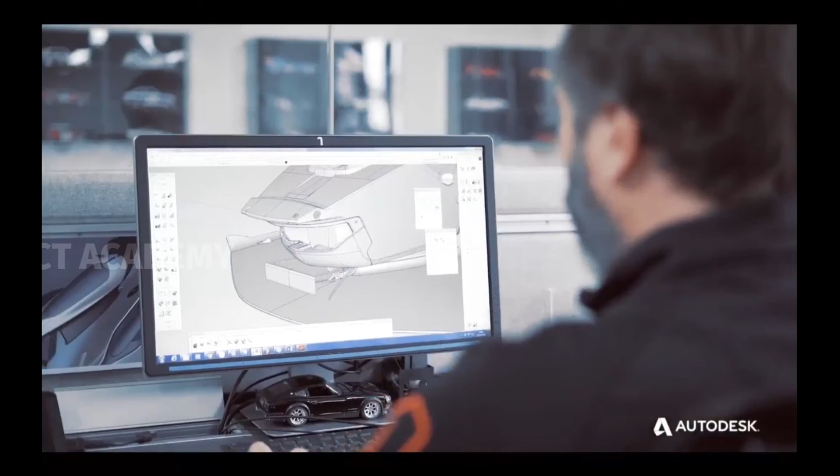We focus on clever use of materials, we focus on our processes, and our clever use of the available softwares that we have to us in order to optimize the components on the car. A classic example of some of the innovation we've got here at BAC is our two-piece carbon hybrid wheel.

So we've taken an alloy wheel, the lightest 17-inch alloy wheel in the world, and we've made it 2 kilograms lighter. But we weren't content with that. We wanted to move that forward.

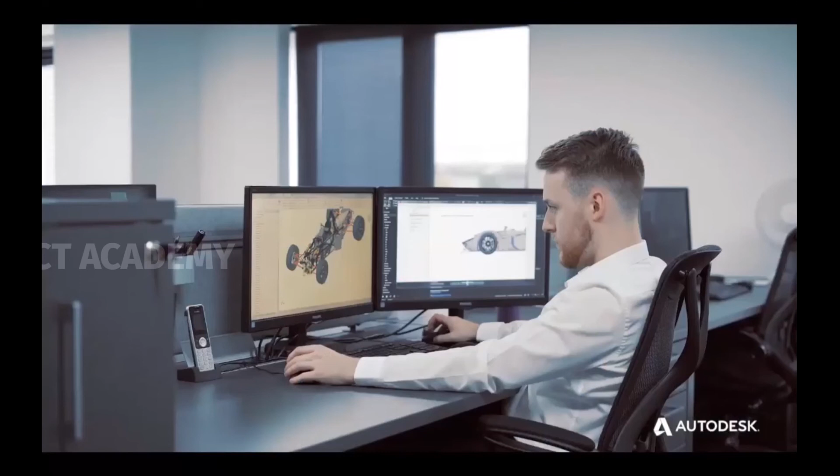And that's where we utilize generative design. We work very closely with our friends and colleagues at Autodesk to basically apply the same load case to the same wheel to see where we can optimize the structure. Using the constraint system within the software, we could constrain the areas of the wheel that the designers were particularly protective about, and that forced the software to look into specific areas to optimize the weight reduction.

I think the solution that we've come up with is absolutely incredible. We've saved an incredible 1.25 kilos just from the centerpiece alone. So we've moved this lightest wheel already further into a completely different stratosphere.

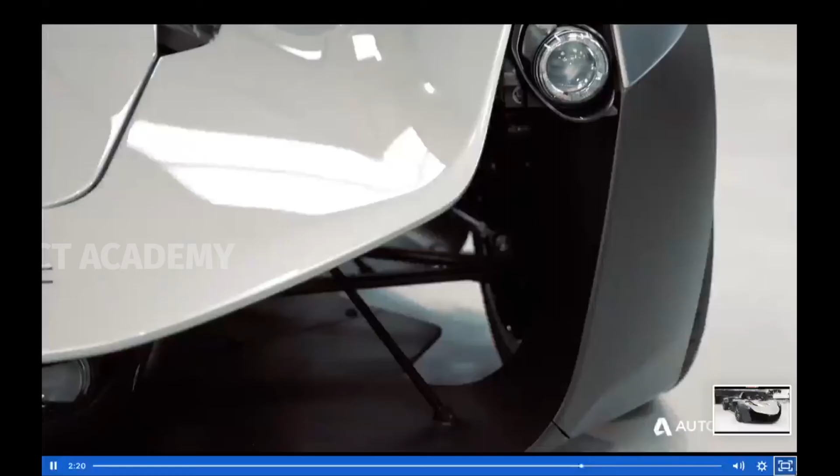So the new mono represents the next stage of our design DNA, described by Jeremy Clarkson as one of the most iconic shapes he's ever seen. The car never ceases to amaze me or anyone else who sees it, just how striking it is.

To move that design forward was actually a really tough challenge. The car has got this slightly more aggressive, lower, sleeker, longer stance, which is even more striking and looks incredible.

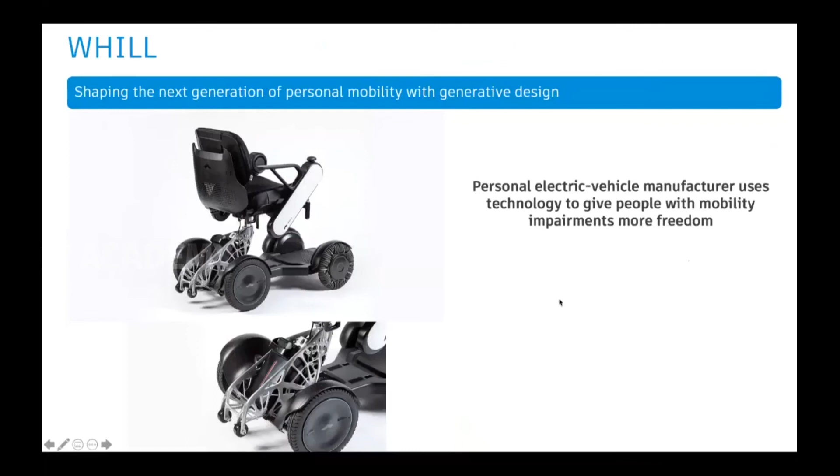This is another example, WHILL, and it's a startup company from Japan, and they wanted to solve a social problem. They adopted generative design in their workflow. And what you see on the left side, they used our technology to solve the social problem.

One of the things they wanted to adopt in their workflow is a more portable electric vehicle with mobility in mind. What that really means is, when they first developed their product, they got feedback from the customer saying that if the product had been much lighter, if they could have reduced the weight, that could have helped them a lot.

The designers started thinking about how they could reduce weight on the frame while still maintaining the drive mechanism intact. So they started using generative design in their workflow and applied it to optimize their frame. Their future plan is to make this a mass production model using generative design.

So not only in automotive industries, but even startup companies like WHILL are using generative design in their workflow and trying to solve social problems. And they were the best innovation.

They got the best innovation award in 2018 by CES, the Consumer Electronic Show. And not only that, they were also listed by Time Magazine as one of the 50 best inventions of 2018. So likewise, these are the different industry customers

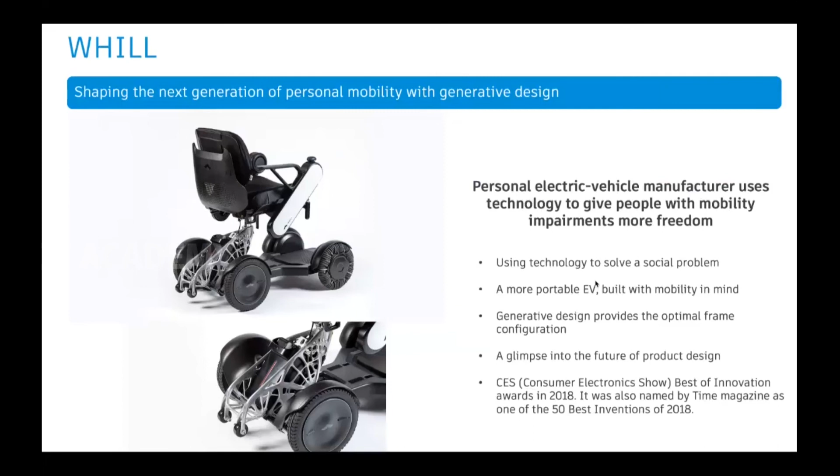that have adopted generative design in their workflow. As I mentioned, now let us quickly look at the ones that are being worked on by the academic institutes as well.

What you see on my screen is very similar to the complete presentation that Badari showed you. This is a product being developed by an academic institute, Dayananda Sagar University, who adopted generative design when they saw it in 2018 at Autodesk University in Delhi. They decided this was the technology to adopt for their final year project, and in 2019 applied generative design to a simple 4-bar quadcopter chassis, reducing its weight and successfully flying it.

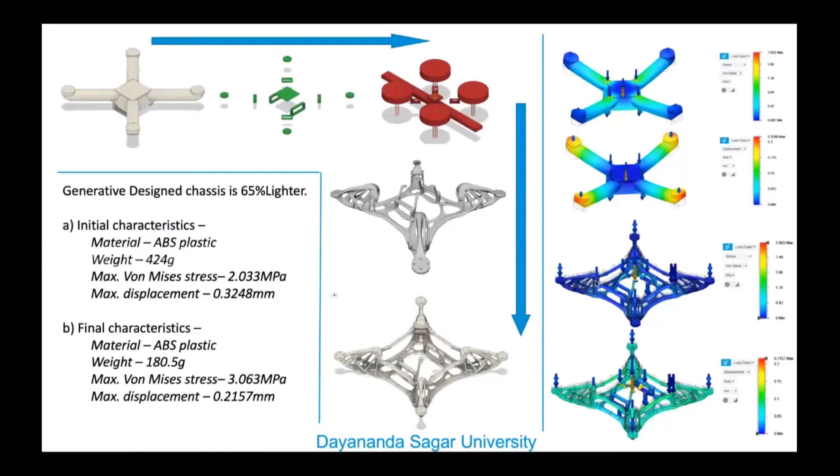The screen shows the different iterations they worked upon. They did the simulation part of it, the stress analysis, and this is the actual flying model they developed. They got into 3 different modes - one is an aesthetic look, another is a strong one, with different materials as well. Altogether these projects were also showcased at different Autodesk events.

So not only the industry, but the academia is also engaging with this. I would encourage academicians who have access to generative design to try exploring the technology before it is pulled out from you, because there is a cost involved - you have to have the cloud credits to do the computation for generative design.

Here's another example I would like to highlight, again from academia. What you see on the left side - this is an electronics guy with no clue about mechanical design aspects at all, but his team has won multiple competitions with their robot, using PVC pipe and everything. What you see on the left side is his actual design.

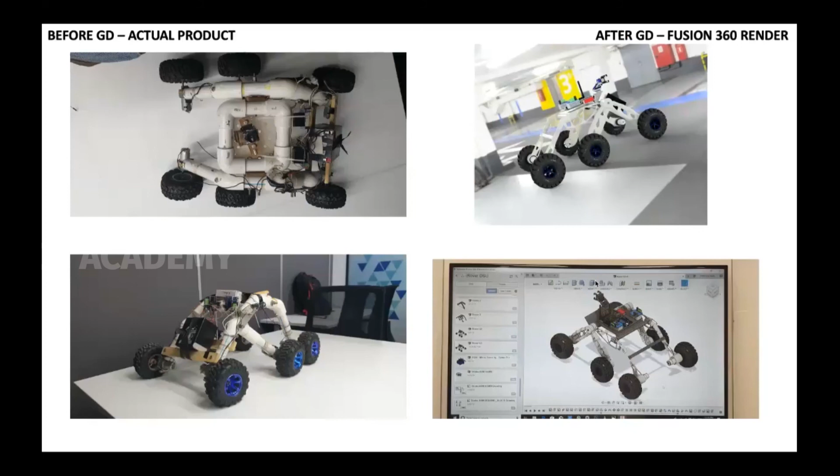When we collaborated with the same electronics guy, what you see on my right side is the output after we applied generative design - different, aesthetically better, and so compact. This is their actual product that was developed and showcased in multiple events. People who attended AU last year and Fusion Academy might have seen these products live and working.

Very interesting from an Indian perspective as well - IIT Madras and Fiat Chrysler collaboratively worked on a lower control arm using generative design technology. To their surprise, what they achieved was the LCA had a 26% appreciable mass saving.

Traditionally, what you see on the left side in yellow color is the current aluminum casting design, that's what is being used in FCA right now. But there's a study going on and they're almost close to that. My colleague Ramesh has helped them in achieving this goal. Now what you see on the green side is the additive manufacturing output using generative design.

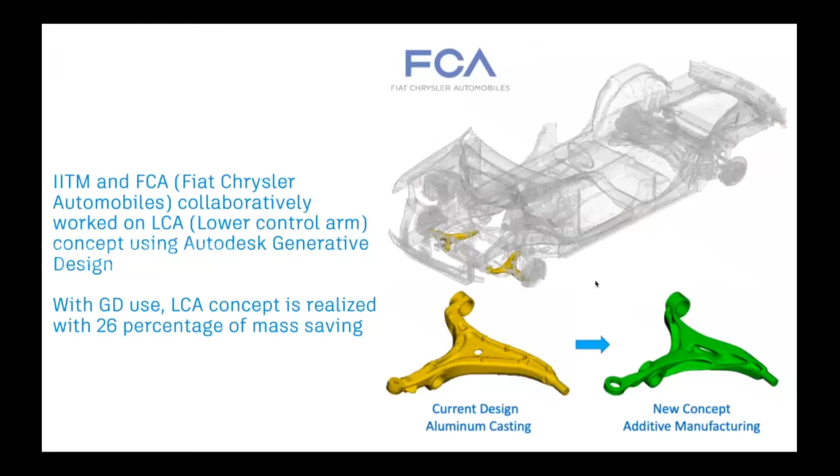So what I'm trying to say is it's both ways - both the commercial customers as well as academia started working and understanding the power of generative design, and trying to incorporate that technology into their projects, into their workflows, into their products as well.

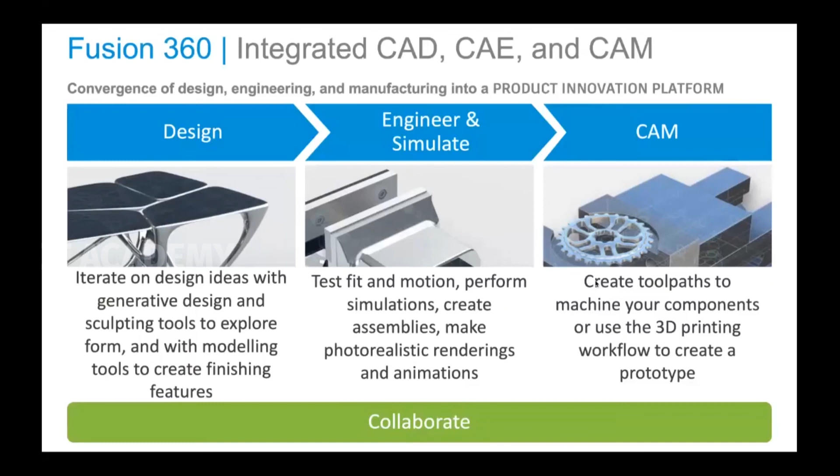So in all, what I really want to say is that gone are the days of working in silos on a specific software. Now is the era of the product innovation platform, where design, engineering, and manufacturing are going to converge into one. This is the era of collaboration, and this is the era of cloud. We definitely have to adopt such newer technologies in our workflow. What we are going to achieve is instant access to my work anywhere, anytime, through any device - that's the power of collaboration, generative design, and cloud.

With that, I think I'm done with my presentation, and now we are open for Q&A. Hopefully the information we shared was useful - there were certain technical issues with our presentations, especially from Ramesh's side, but the content was really helpful.

Unfortunately, that was not displayed on the screen.

But overall, considering all three talks, I think you got a fair idea of exactly what generative design is all about, how Autodesk has developed this technology and brought it to both commercial and academic customers, and how both are using it in their workflows. So I think it's the right time for all of you to look at this technology and start adopting it in your workflows.